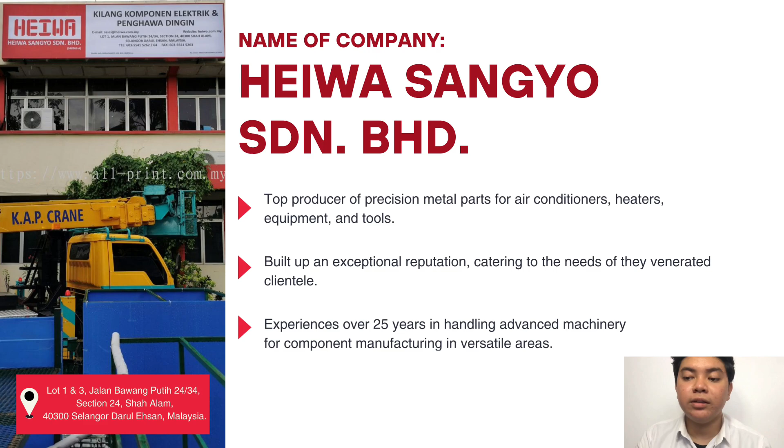This presentation will cover distribution of work, introduction and details of the company, manufacturing process and technology employed, design concept and quality assurance, product produced, problems faced, discussion, continuous quality improvement, reference and evidence of group work.

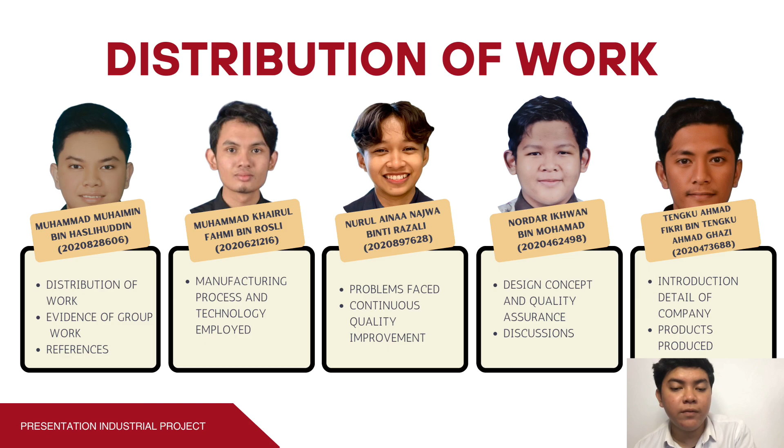Assalamualaikum. Next, I will present details of the company. Heiwa established presence in the year 1995, with the first company registered as Heiwa Sangyo Sdn Bhd, where the company began with supplying four brass connectors to their first client, GM Corporation.

The second company was Heiwa Precision (M) Sdn Bhd, established in the year 2000 to serve another customer base including Carrier International with different needs and legislation. The company specializes in supplying components in versatile areas such as household and industrial air conditioning, cooling and heater systems, power conductors and so on.

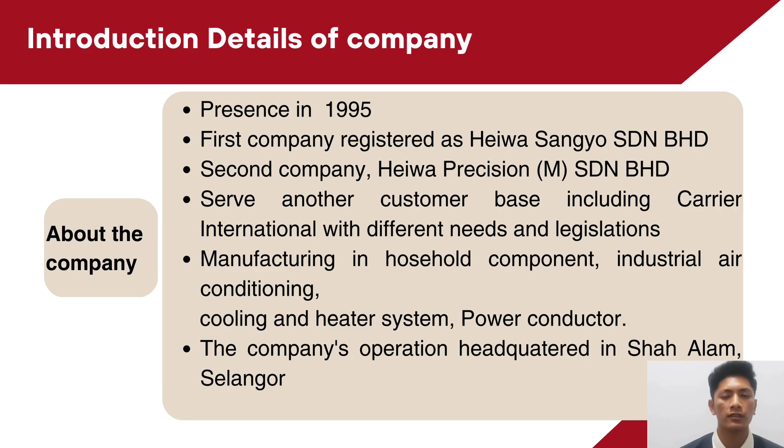Today, the company is capable of manufacturing thousands of varieties of custom-made metallic components and equipment, utilizing advanced machineries with high precision and commendable quality to supply customers globally.

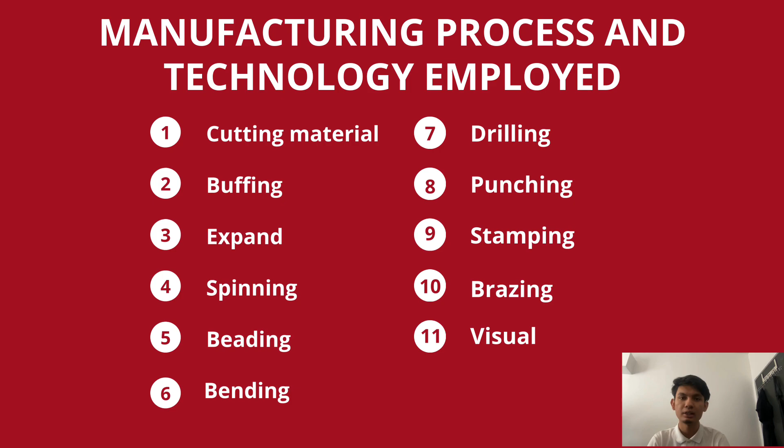For the manufacturing process and technology employed, there are 11 processes: cutting material, buffing, expanding, spinning, beading, bending, drilling, punching, stamping, brazing and lastly visual inspection.

Cutting material process in manufacturing refers to the technique used to remove or separate a piece of material from a larger workpiece in order to create a specific shape or feature. One of the common cutting processes used in manufacturing is machining. This is a broad category that includes a variety of cutting processes such as turning, drilling, milling and grinding. This process uses machine tools such as lathes, mills and grinders to remove material from the workpiece.

For this process, a long copper pipe needs to go through the cutting process in order to obtain a desired dimension, and the machine tool used is an automatic grinding cutting machine.

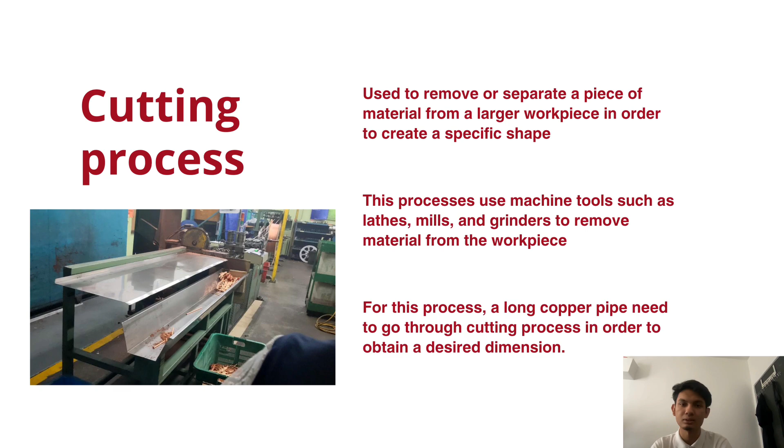Buffing is a finishing process in manufacturing that involves the use of a buffing wheel and a buffing compound to smooth and polish the surface of a workpiece. The workpiece is held against the rotating buffing wheel, and the friction between the wheel and the workpiece removes small amounts of material and produces a smooth, glossy finish. Buffing is commonly used on metals, plastic and other materials.

After the copper pipe passes through the cutting process, buffing is mandatory to improve its aesthetic appearance and remove any surface imperfections.

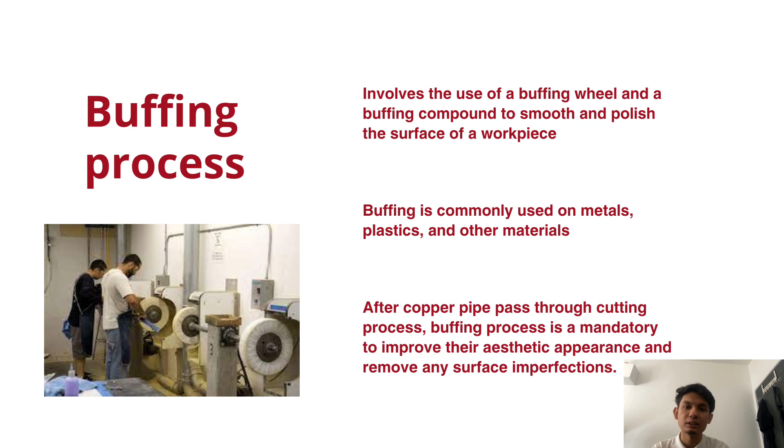Expanding is a manufacturing process that increases the size or volume of a material, usually a metal or a plastic. The process is usually done by heating the material until it reaches a specific temperature and then applying pressure to stretch it out. The specific method of expanding can vary depending on the material and the desired outcome. It is used to create parts with increased strength, improved surface finish, better dimensional accuracy and other benefits.

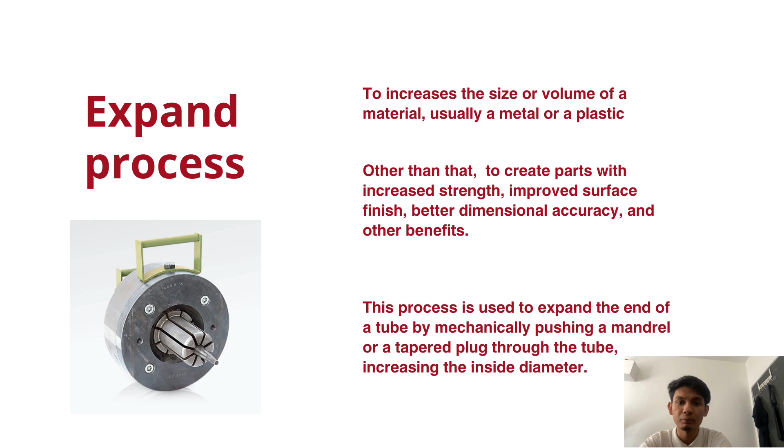An example of expanding process is tube expanding. This process is used to expand the end of a tube by mechanically pushing a mandrel or a tapered plug into the tube, increasing the inside diameter.

For the spinning process, we have two types: spinning full close and spinning half close. Spinning full close is a manufacturing process that involves shaping a metal material by pressing it against a spinning form or mandrel. In full close spinning, the material is pressed against the entire circumference of the mandrel, which forms the material into the shape of the mandrel. This process is used to create parts with a uniform thickness, such as a cylinder or a cone.

For spinning half close, this process is used to create parts with a varying thickness, such as a hemispherical shape or a dome. The spinning process is typically done using a spinning machine, which consists of a spinning head that holds the mandrel and a tailstock that supports the material. The spinning process is a cost-effective method that is widely used in the production of sheet metal parts and many other industrial components.

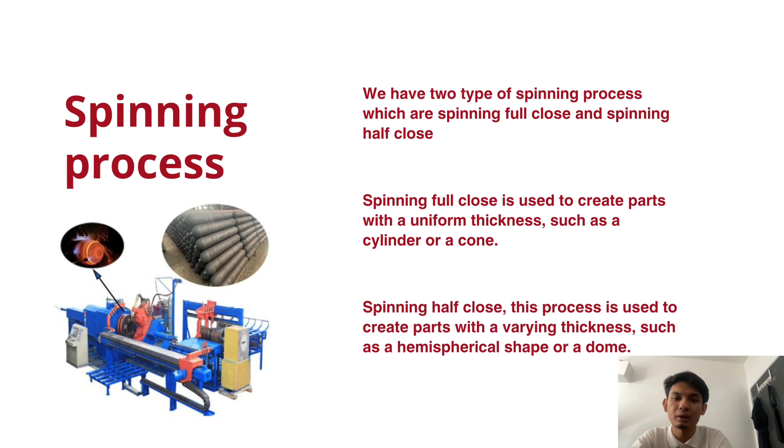Additionally, it is a precise and accurate process that produces parts with a smooth surface finish.

Beading is a manufacturing process that involves shaping a metal material by pressing it against a beading tool, a specialized tool used to create a raised or beaded edge on a sheet of material. Beading can be done by hand or by using a machine, and it is used to add strength and rigidity to a sheet of material, as well as to create a decorative edge.

The process of beading is performed by a roller tool that is pressed against the material. The roller has a specific shape that will be transferred to the material in the form of a raised edge or bead. The process can be done with a handheld tool or in an industrial machine.

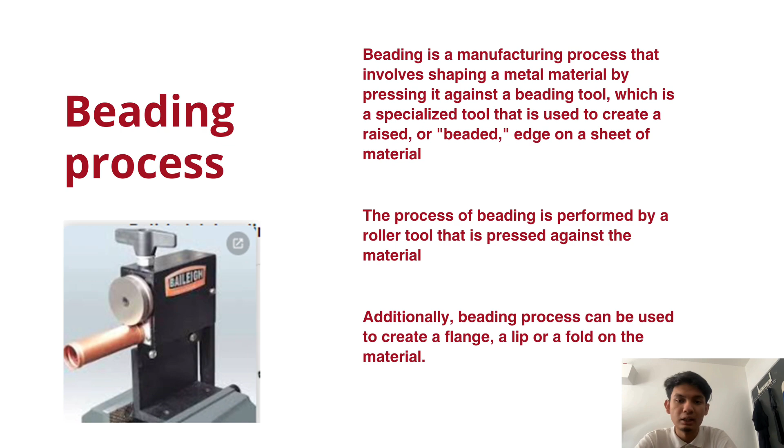Beading can be used to create a variety of different shapes and designs, including a round bead, a square bead, a double bead, or a decorative edge. Additionally, the beading process can be used to create a flange, a lip, or a fold on the material.

For the bending process, we have three types: manual bending, NC bending, and CNC bending. Manual bending is a manufacturing process where metal is bent by hand using a bending tool, such as a bending brake or a handheld bending tool. The process involves clamping the material in place and then using a lever or handle to apply force to the material, causing it to bend at a specific angle.

NC, or numerically controlled, bending is a manufacturing process where sheet metal is bent using a machine controlled by a computer program. The process involves inputting the desired bend angle, radius, and other parameters into the machine's computer, which then automatically controls the movement of the bending tool, ensuring a precise and accurate bend every time.

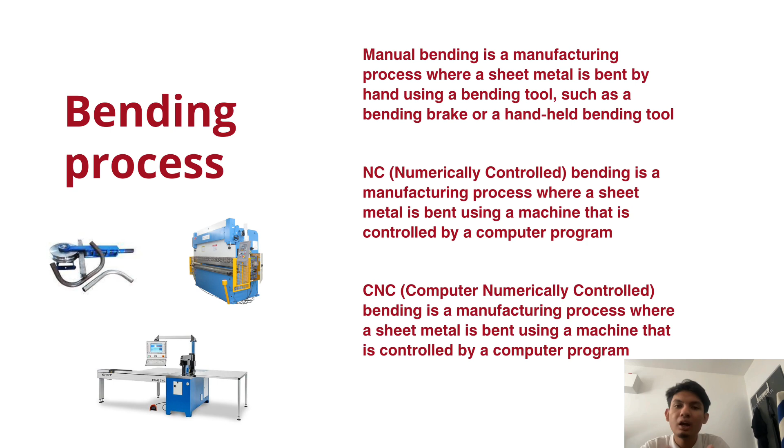Lastly, CNC bending, or computer numerical control bending, is a manufacturing process where sheet metal is bent using a machine controlled by a computer program. The process involves inputting the desired bend angle, radius, and other parameters into the machine's computer, which then automatically controls the movement of the bending tool, ensuring a precise and accurate bend every time.

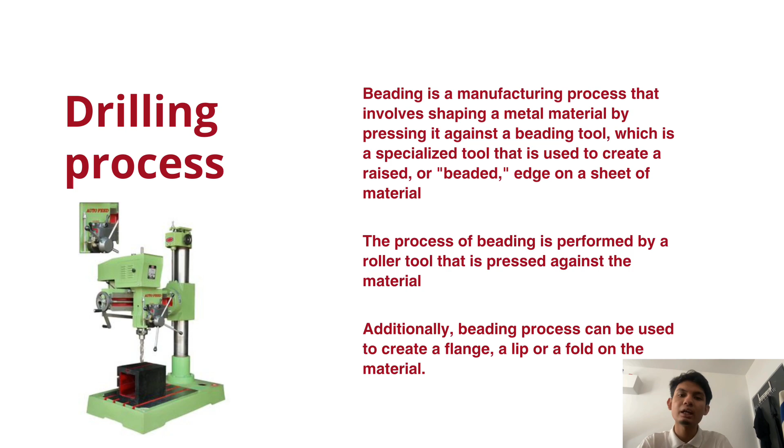Drilling is a manufacturing process where a tool called a drill bit is used to create a round hole in a workpiece. The drill bit is rotated at high speed while pressed against the workpiece, cutting away material to form the hole. For this process, the type of drilling used is machine drilling, where a drill bit is inserted into a chuck and rotated by a motor. This method is mainly used for drilling tight tolerances and for large-scale production runs.

Punching is a manufacturing process that uses a tool called a punch to create a hole or shape in a workpiece. The punch is a hardened steel rod or tool with a shaped end that corresponds to the desired hole or shape. The punch is pressed against the workpiece, cutting away material to form the hole or shape.

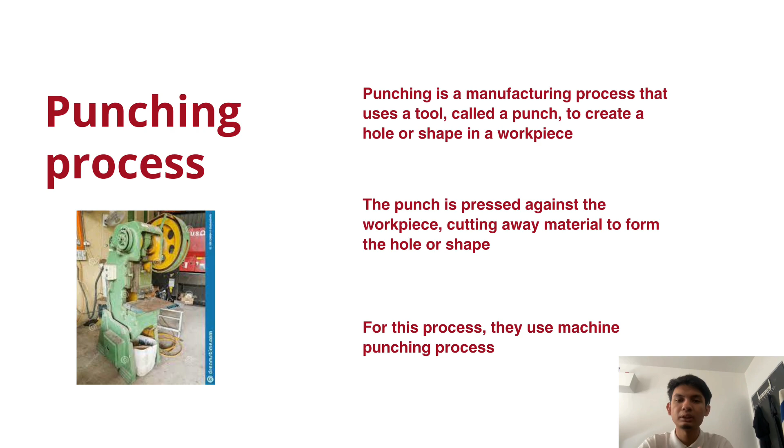For this process, they use the machine punching process, where a punch is inserted into a holder and pressed against the workpiece by a machine. This method is mainly used for punching large holes, punching in tight tolerance, and for punching in large-scale production runs.

Stamping is a manufacturing process where a tool called a die is used to shape or cut a workpiece. The die is a hardened steel tool with a shaped surface that corresponds to the desired shape or cut for the workpiece. The die is pressed against the workpiece, cutting away material to form the shape or cut.

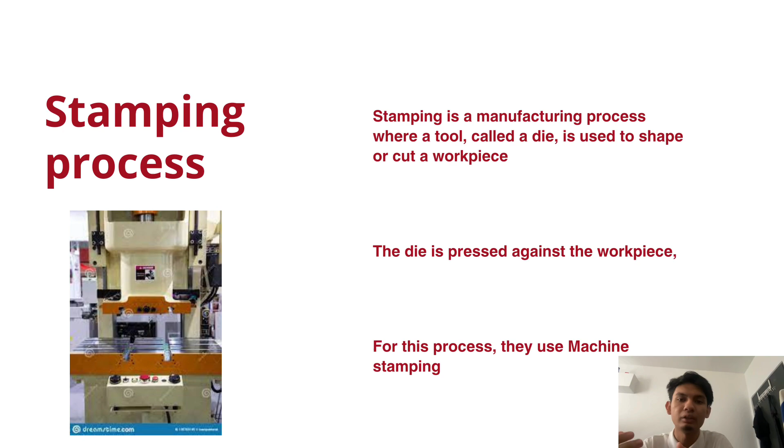For this process, they use machine stamping, where a die is inserted into a holder and pressed against the workpiece by a machine. This method is mainly used for stamping large shapes, stamping in tight tolerance, and for stamping in large-scale production runs.

Brazing is a manufacturing process where two or more metal parts are joined together by heating them to a temperature above their melting point and then introducing a filler metal called a brazing alloy, which melts and flows into the joint between the parts. The filler metal is typically a brass, silver, or aluminium alloy, and has a lower melting point than the base metal being joined.

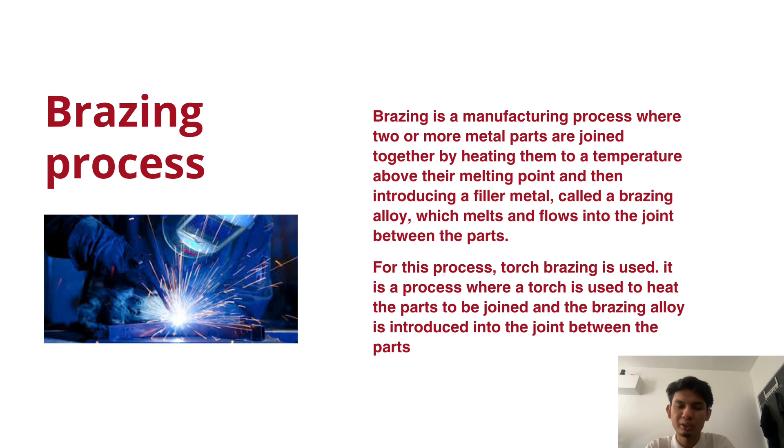For this process, torch brazing is used, a process where a torch is used to heat the parts to be joined and the brazing alloy is introduced into the joint between the parts.

One example of a visual process in manufacturing would be using visual inspection to check for defects in manufactured products. This can include using human inspection or automatic visual inspection systems, such as camera or machine vision systems, to check for things like surface defects, dimensional inaccuracy, or other issues.

Visual process inspection is an essential step in quality control and quality assurance. It can be done manually using human inspection or by using a machine vision system, which uses cameras and computer algorithms to automatically detect and identify defects in a product.

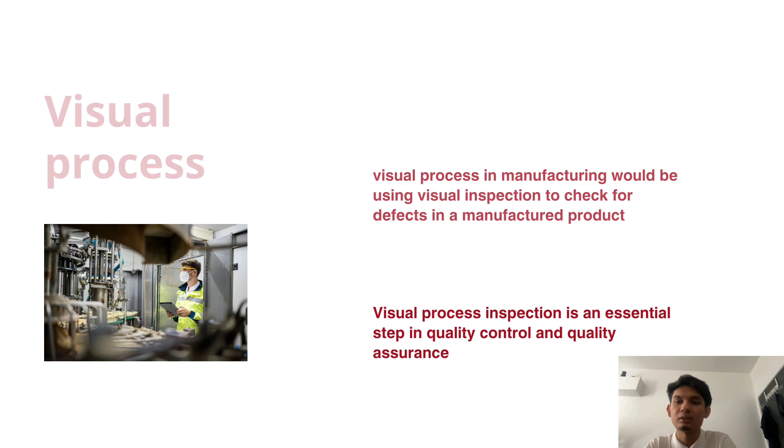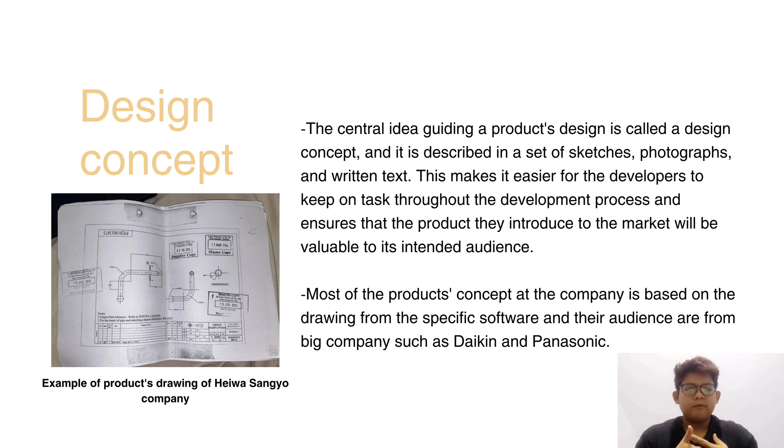For the design concept, the central idea guiding a product design is called a design concept, and it is described in a set of sketches, photographs, and written text. This makes it easier for the developer to keep on task throughout the development process and ensure that the product they introduce to the market will be valuable to the intended audience.

Most of the products at the Heiwa Sangyo Sdn Bhd company are based on drawings from specific software, and their audience are from big companies such as Daikin and Panasonic. On the slide you can see an example of the drawing that they made.

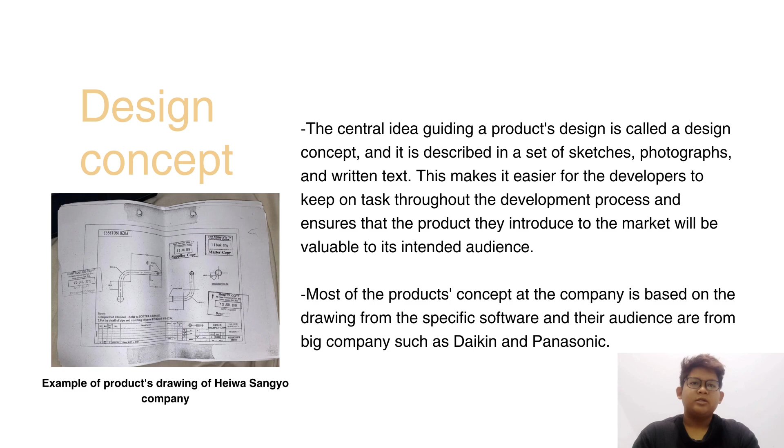Quality assurance can be defined as a component of quality management focused on developing confidence that quality criteria will be met. The higher the quality assurance provided, the more customers will be attracted to purchase the product, as they want the product in good condition and get the best service that will benefit them.

As you can see on the slide, there are the quality objectives of Heiwa Sangyo Sdn Bhd, which are, for example, number 1, less than 1.3% rejects per year, and number 2, 98% on-time delivery, which will benefit the customer.

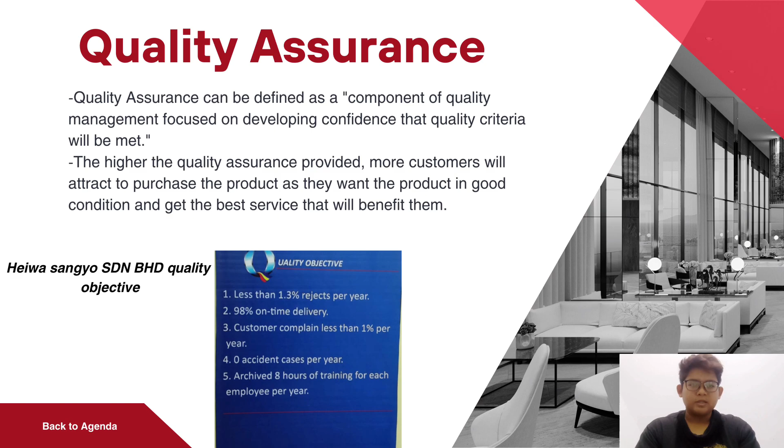Next is the product produced. The product that we chose was the compressor coil. A compressor coil, also known as a refrigerant coil, is a crucial component in refrigeration or air conditioning systems. Its main function is to compress refrigerant gas from a low pressure state to a high pressure state in the air conditioning system.

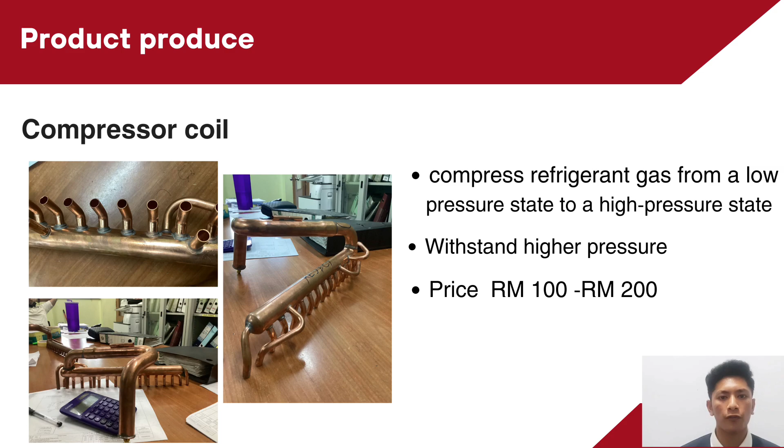The material used in the production of compressor coil is high quality material, which is copper that has high strength and can withstand high pressure. Lastly, the price of compressor coil ranges from 100 ringgit to 200 ringgit.

Assalamualaikum. My name is Nurul Adinaja binti Razali. Now, I will present the problems faced during the manufacturing process.

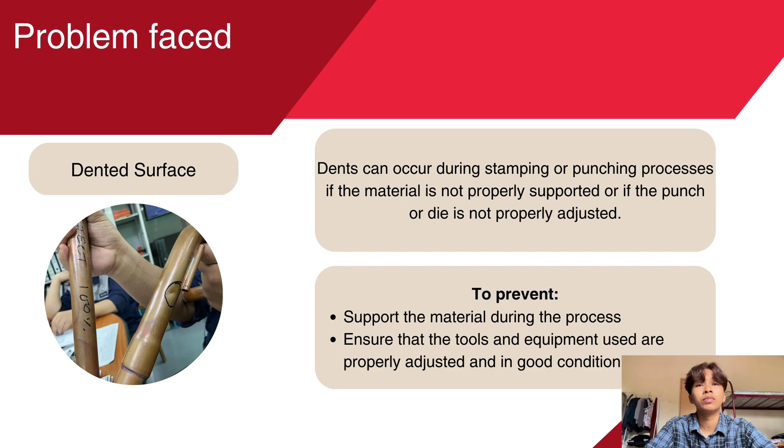Firstly is dented surface. Dents can occur during stamping or punching process if the material is not properly supported or if the punch or die is not properly adjusted. To prevent dented surface, it is important to properly support the material during the process and ensure that the tools and equipment used are properly adjusted and in good condition.

Next is the tube connector leak. Leaks can occur during the brazing process if the connector is not properly cleaned or if the brazing material is not properly applied. To prevent connector leaks during manufacturing, it is important to ensure proper fitting, installation and use of correct materials. Then, ensure the temperature used is suitable for the material.

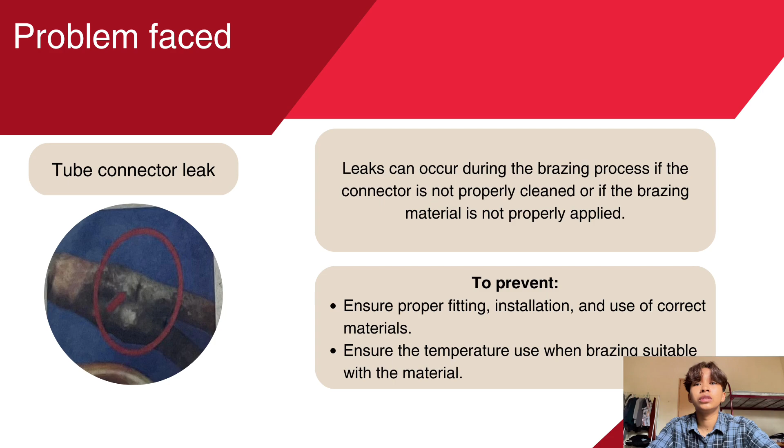For continuous quality improvement (CQI), it is a deliberate, defined process which is focused on activities that are responsive to community needs and improving population health. It is a continuous and ongoing effort to achieve measurable improvement in the efficiency, effectiveness, performance, accountability, outcomes and other indicators of quality for state and local program levels.

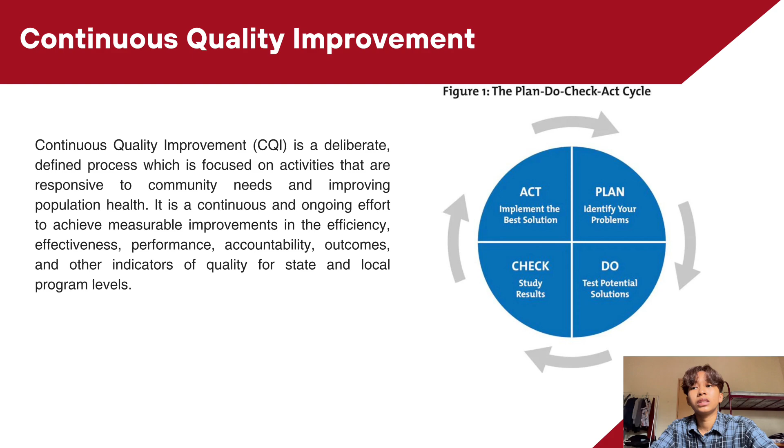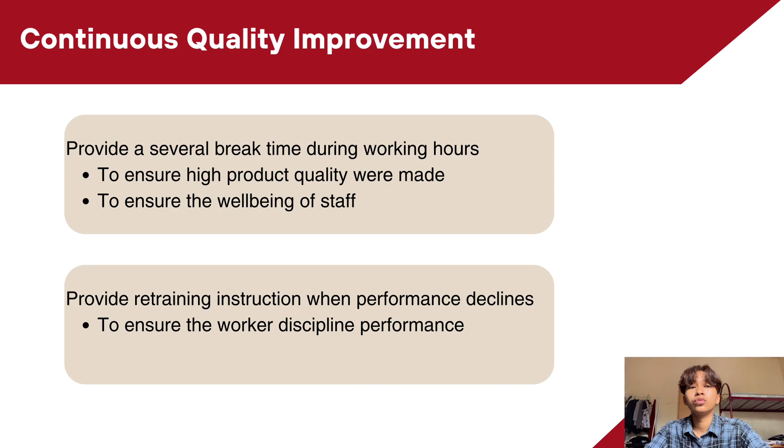To improve the quality of the product, they have two things that can be used. First, provide several break times during working hours. It is to ensure high product quality is made and to ensure the well-being of staff. Second, provide retraining instruction when performance declines. It is to ensure the worker's discipline and performance.

So for the discussion, the product is well designed by using the software and able to attract well-known companies to become their regular customers, such as I said before, Daikin and Panasonic.

The other recommendation is welding method can be used to replace the brazing method. Welding method is better because it can produce a stronger joint. Welded joints are also suitable for high temperature applications, hence it will allow the product to withstand heat more efficiently. Furthermore, the defects can be overcome if the right setting of the machine is used, and tools and equipment have been adjusted in the right order and in good condition.

So for the last one, the excess copper from the cutting process can be sold again. One of the staff at the factory told us that copper is really valuable. Even the excess copper that comes out as dust during the cutting process will have its own value if it is sold again.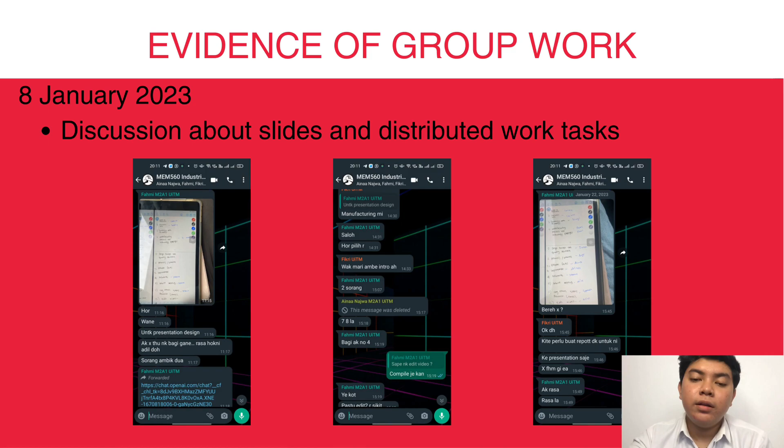8 January 2023, we had a discussion about the slides and distributed the work tasks. On 27 January 2023, we practiced the presentation, and the final presentation was recorded on 28 January 2023. Thank you.